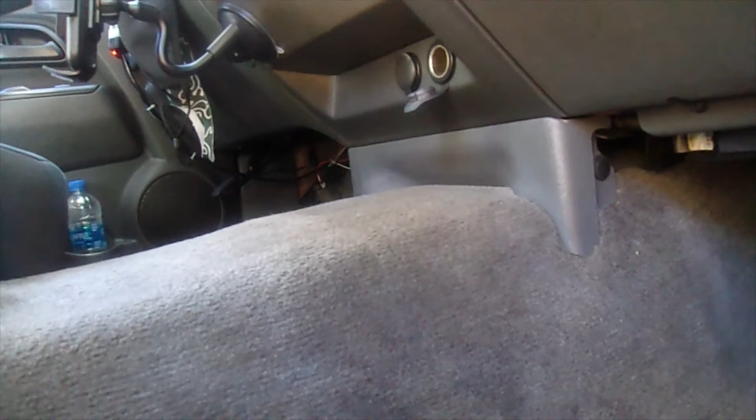Most cars have a fuse box right here on the passenger side, under here. Others have a fuse box on the driver side, under the steering wheel. But this car is different.

I'll show you the location of the fuse box on this car. This fuse box is in the engine. So this is the engine of the car, again a 2006 GMC Canyon, and you can see how this engine is looking.

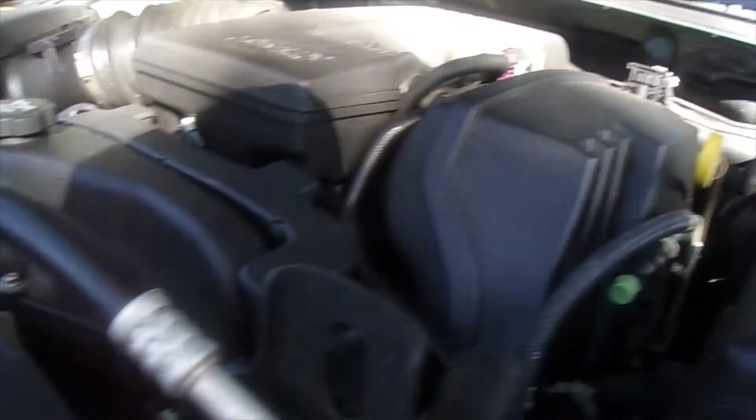If you look all over the engine, you see how much protection they put in this engine. Too many covers. Everything is almost covered, even the battery. You can see the battery wire here and the battery, but the battery is covered inside this plastic cover.

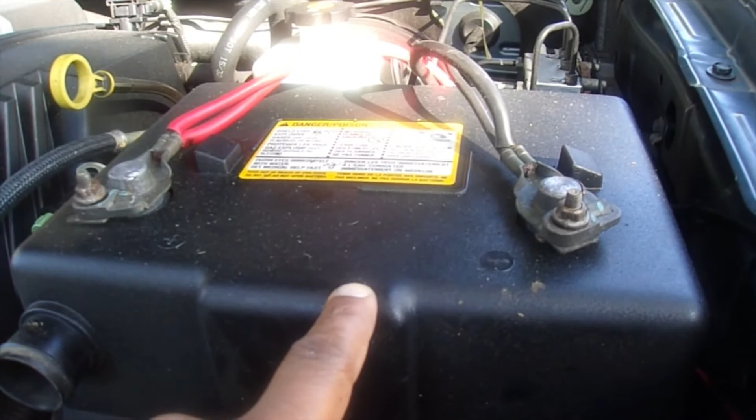So the fuse box, you see the battery, this is the battery, and this is the fuse box right here, right next to the battery. The fuse box is also covered in the same kind of plastic that's all over this engine.

So I'll show you how to check the fuses. There's a pipe here that goes inside the battery coming here. This is basically just to keep all the dirt from going inside the battery. That's why this pipe is there.

But you'll need to unhook it to remove the fuse box. You can just temporarily unhook it, nothing will happen. And then this is the fuse box right here. You can see there's an arrow here facing this side, and inside here there's another arrow on this side facing this side. So that means there's a clip here on this side.

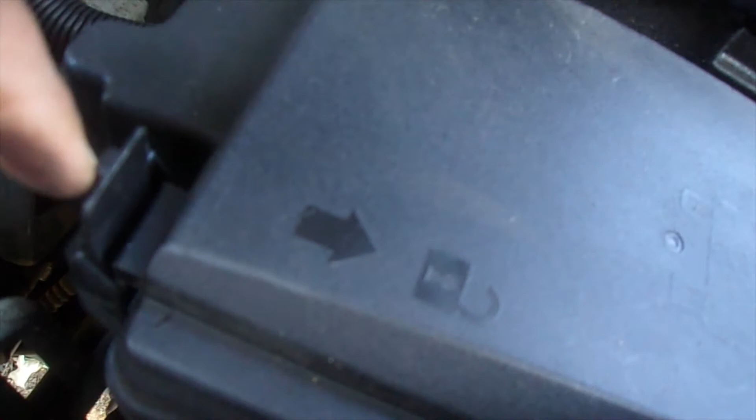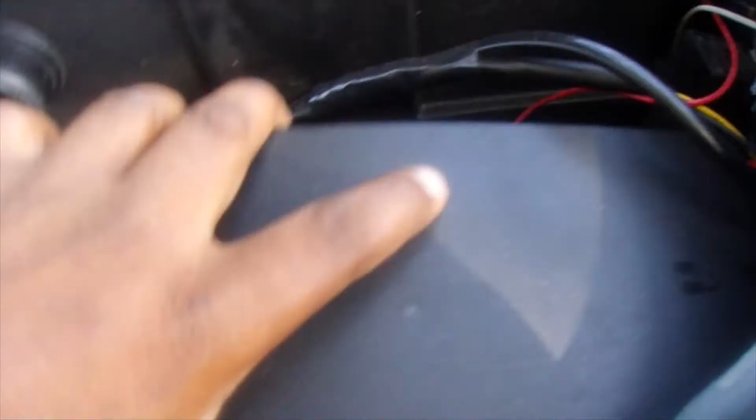There's another hidden clip right under here. You will see it if you follow this cover on that side, you'll see the arrow on that side. So basically you push in both sides at the same time, and this cover will open up. You push in here, then you push the other side in.

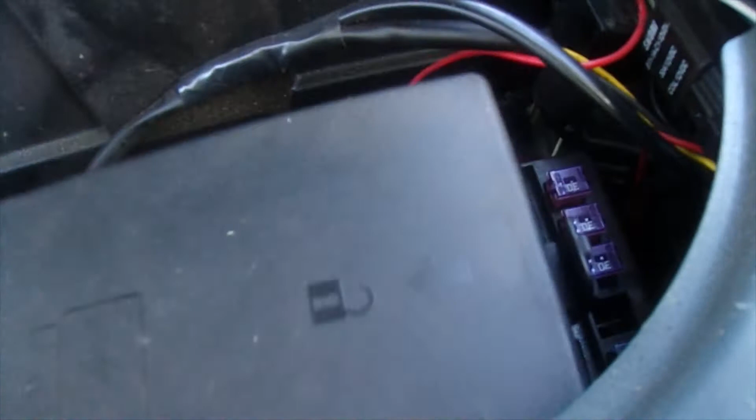You see, once you push in like that, this cover will come off. You see now, all the fuses are in here. It's a lot of fuses.

Inside the fuse box, hopefully you can see. If you look inside the fuse box, the box tells you what every fuse is for.

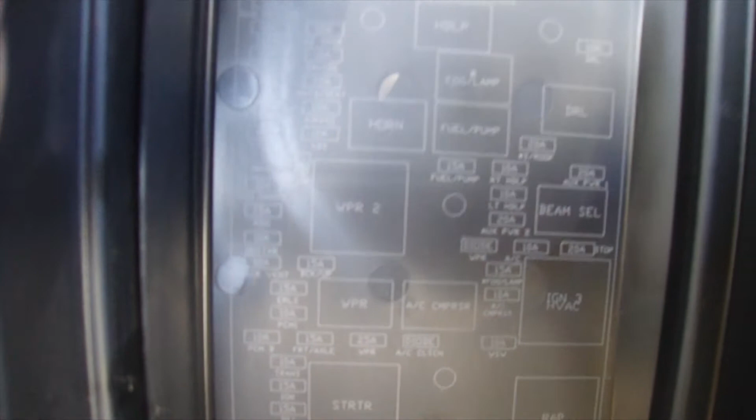And the reason I was looking for this fuse box is because of the radio. The radio stopped playing, so I'm sure I have a blown fuse. It could be a radio fuse or another fuse. So if you check the radio fuse and it's okay, you have to basically check all the fuses and replace all the bad ones.

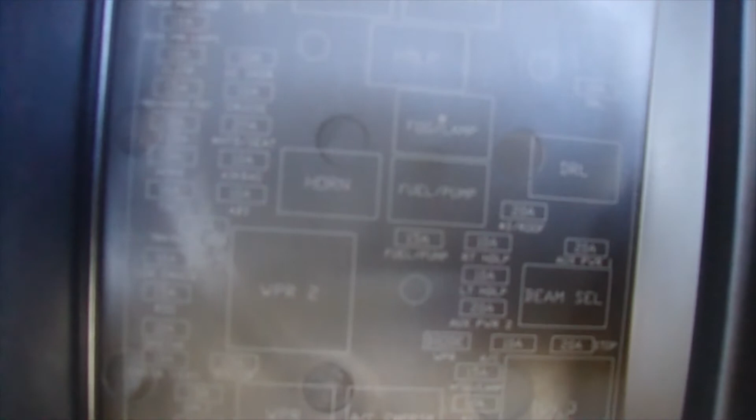If you zoom in here you can see all these fuses, they have their numbers and their names and their amperage. Some are 10, some are 15, some are 40, like this one here, the power seat is 40.

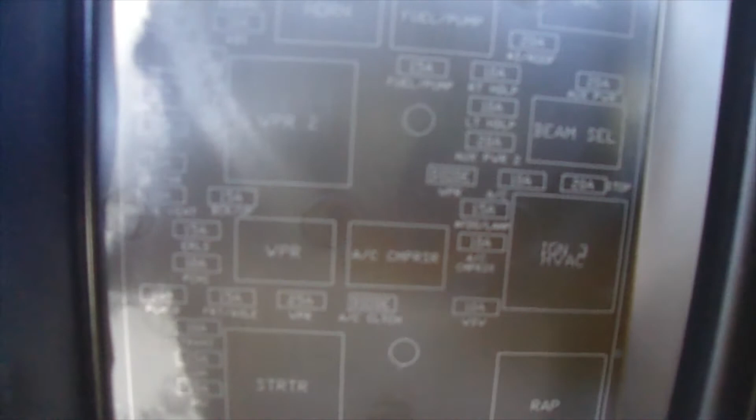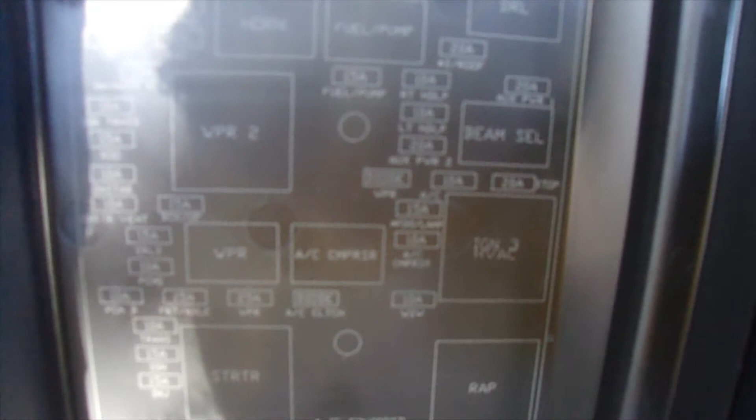So you look in here, if anything is not working in your car, this is the first place you should check. Come here to the fuse box and check if the fuse is okay, and go from there. If the fuse is okay, it's something else, but start with the fuse, check the fuse, and go from there. So again, this video is just to show you the location of the fuse box in this vehicle.

And I know some of these fuses are usually inside the vehicle in most cars, but in this car, these are all the fuses. You can see them, it's a lot of them. It starts right here on this corner. You can see the purple fuses here, and the big ones here, transmission and everything, and it goes all the way to this other side.

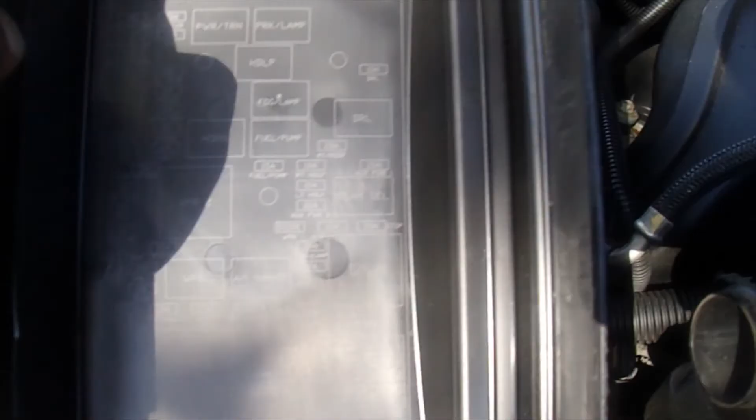So just read inside the box cover, check your fuse and replace it. You can see the different sizes, 10, 15, 20. So make sure you replace your fuse with a similar fuse. Don't put a different amperage size fuse in your car. If it's 10, you replace with a 10. If it's 15, you replace with a 15.

So that's the location of the fuse box in this 2006 GMC Canyon, 3.5 liters, 5 cylinder vehicle. Right there, right next to the battery. The battery is inside here.